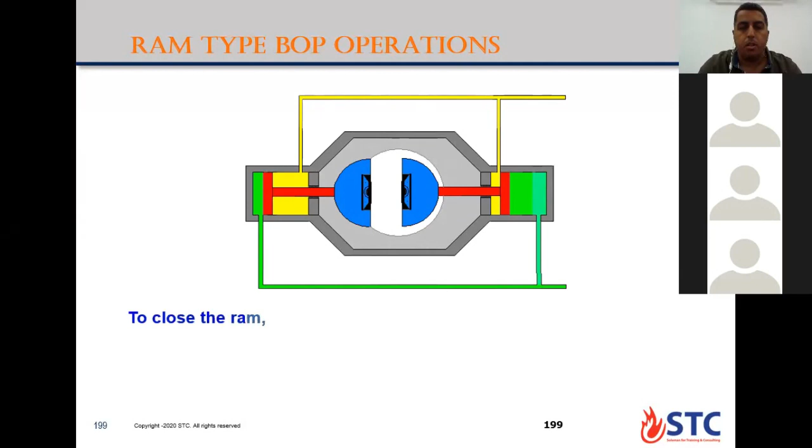This one is RAM-type BOP operation. You have the pipe RAM, so you have hydraulic pressure to open the RAM or give pressure to close it. Each RAM is designed according to the manufacturer to require some gallons of hydraulic oil to close or open. Usually the hydraulic fluid is a closed loop system. When you try to close, you get hydraulic oil passed here to the closing chamber to fill and push the ram to close around the coiled tubing. The other side, the opening chamber, will be vented back to the reservoir tank to the accumulator bottle to be charged again. So this is a closed loop system.

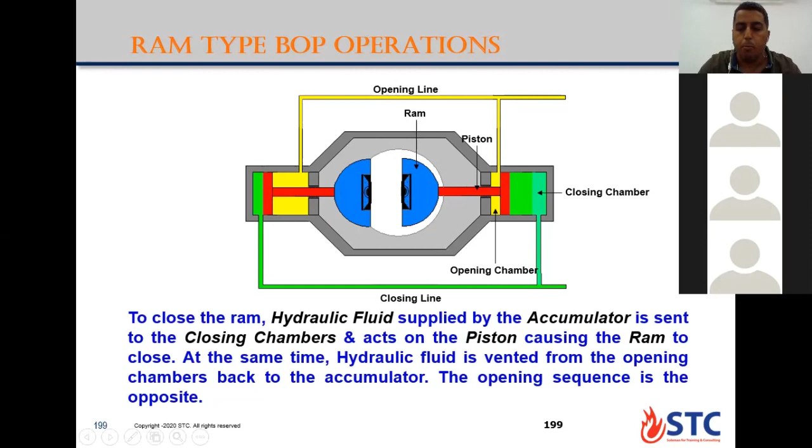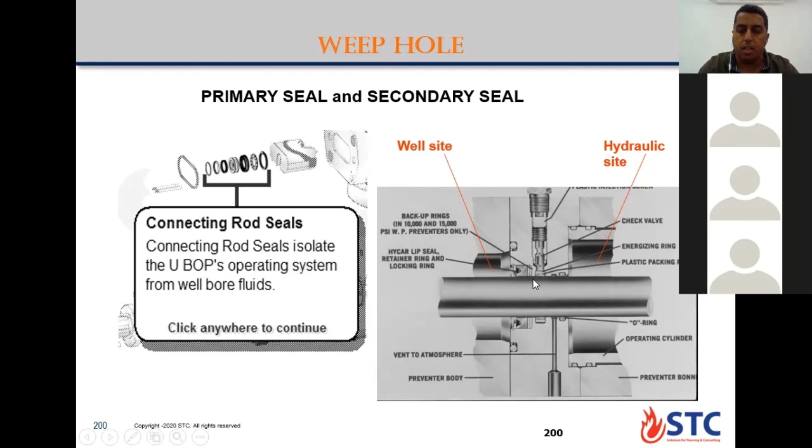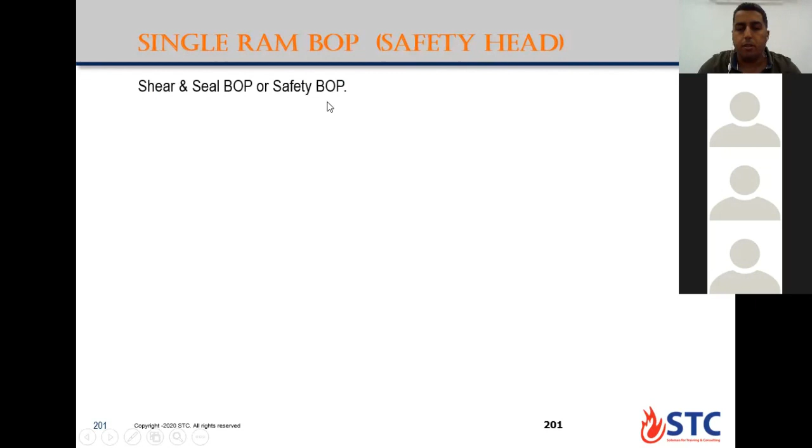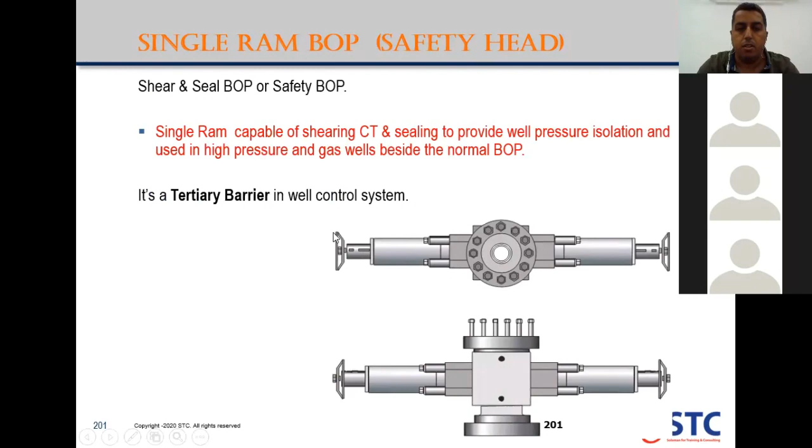This one is the third, or tertiary, well control barrier. In some manuals it's called single ram, safety head, or shear seal BOP. This is used to increase the capability of shearing coiled tubing while at the same time sealing the pressure or isolating the well pressure, especially in high pressure and gas wells, besides the normal BOP, according to company policy. This tertiary well control barrier is mounted above the Christmas tree directly, without any connection below.

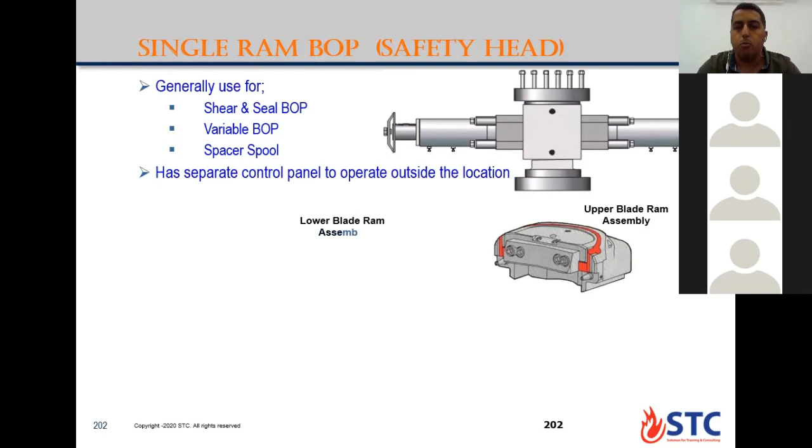It has a separate control panel. We can operate it from a different panel, also from outside the location, because this is the last option. The same remote control panel which has the ESD should also have the capability to operate the safety head in case of any leakage below the safety head, or between the safety head and the normal or quad BOP.

You apply the shear seal as the last option, because you will cut the coiled tubing, dropping it in the well, and then close all valves on the Christmas tree. Before you operate, if you are at the bottom and need to operate the safety head or shear seal, you need to pick up about 10 feet from the bottom and then start to operate the shear ram. Why? To give a chance for the coiled tubing to drop to the bottom of the well, so the Christmas tree valve will be free from any coiled tubing passing through.

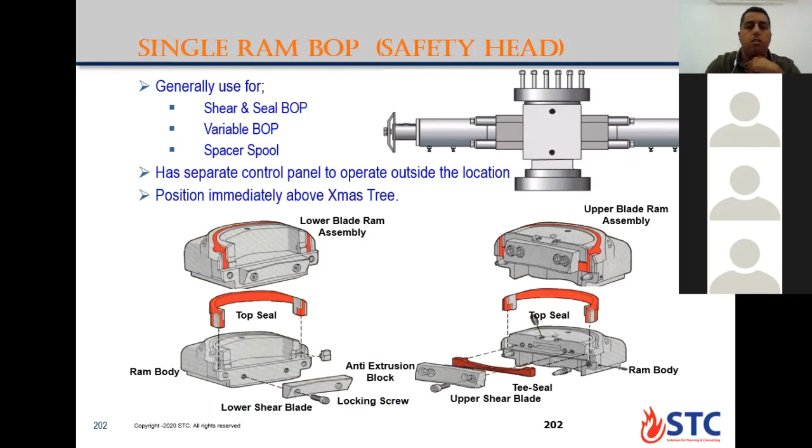This is the shearing and sealing at the same time for the safety head, positioned immediately above the Christmas tree valves.

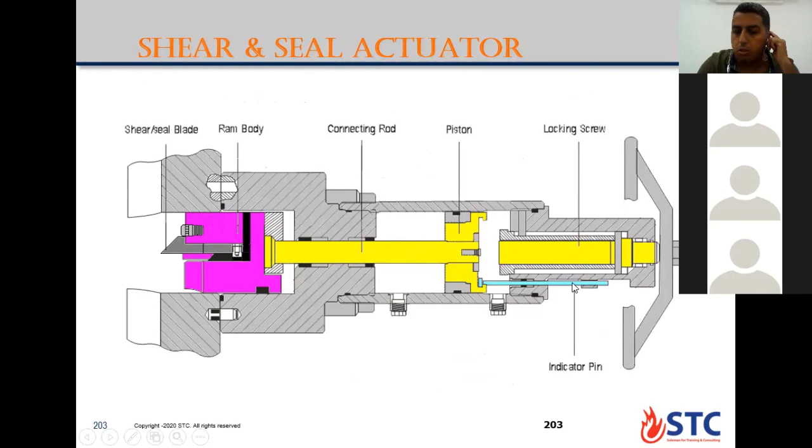This one is the shear seal actuator. This pin gives you indication about the closing and opening of the ram.

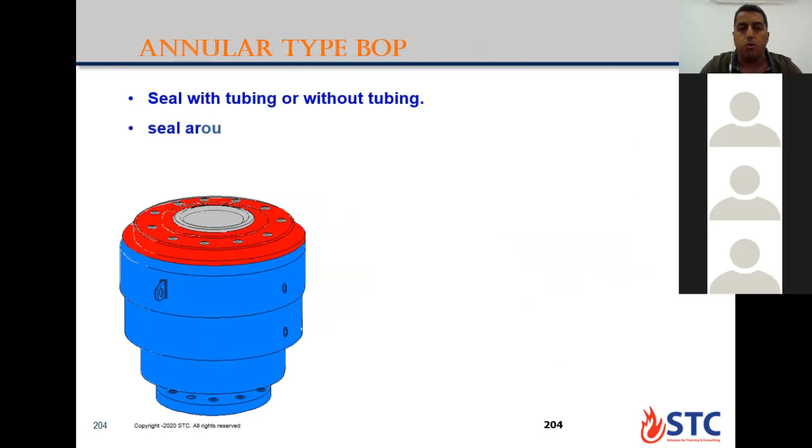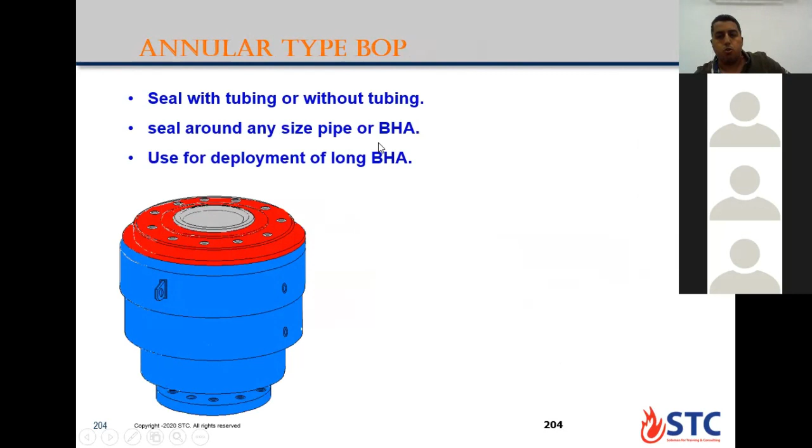This one is annular type BOP, sealed with tubing or without tubing, sealing around any size or shape of pipe or bottom hole assembly, mainly used with long bottom hole assemblies in the deployment system. It's optional, usually installed below the stripper assembly, and has a piston, packing element, and head. You give pressure from the accumulator or hydraulic system to push the piston up to squeeze the packing element to seal around the coiled tubing or bottom hole assembly. You have another port, the closing/opening port, which gives pressure to retract the piston and open the packing element around the pipe.

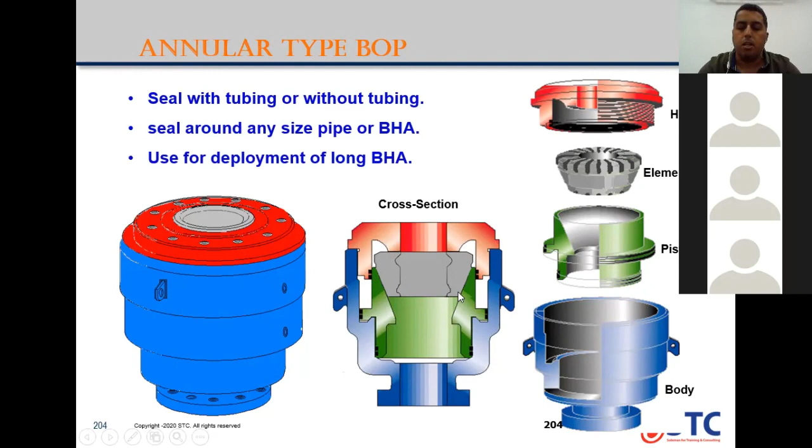This one shows the piston, packing element, opening port, and closing port here.

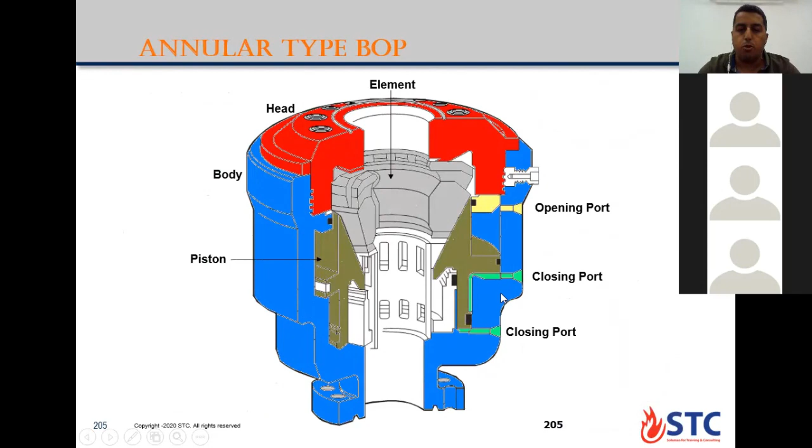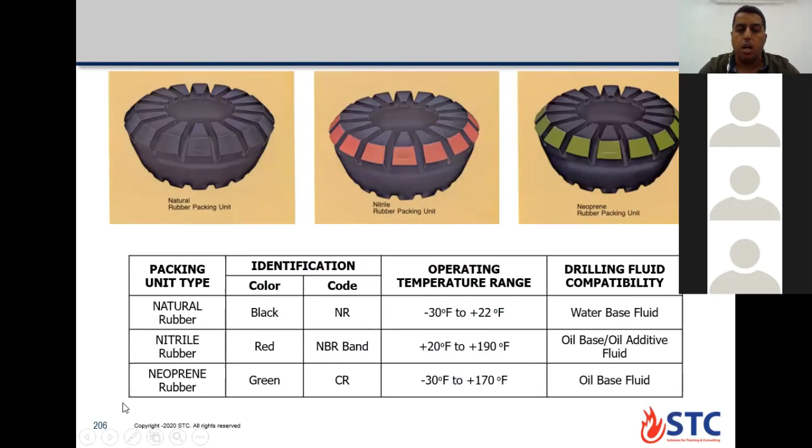This is the material of the packing element used in the annular preventer. You have 3 types of rubber. Natural rubber is suitable with water-based fluid. There is also nitrile and neoprene. Nitrile has additives against H2S and oil resistance, so it's suitable if you are working in an oil or gas well. Nitrile is used in high temperature, and neoprene is used in low temperature.

This is another option which is called flow tee, or pump in sub. Usually the pump in sub is installed between the shear seal or below the BOP. It's used to vent any pressure or take return from the well for circulation, allowing bleeding of well fluid and gases, and assisting in introducing fluid or taking returns from the well during circulation instead of using the kill line. The kill line is only for emergency or killing operations.

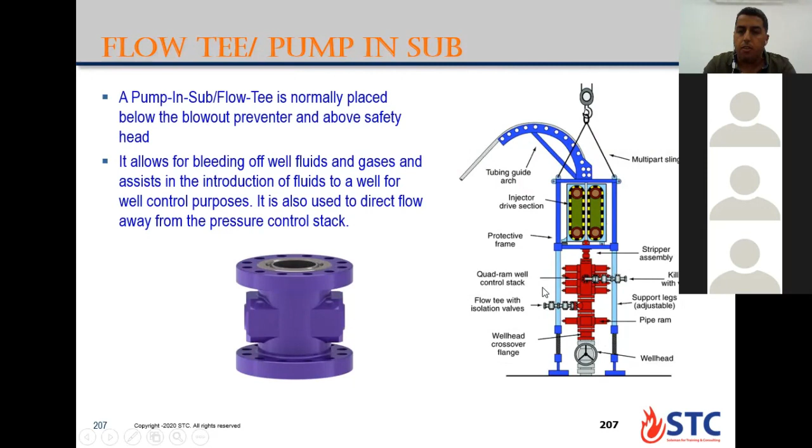This valve, or pump in sub, must have 2 isolation valves from outside. Normally one is manual, the first one near the body of the flow tee, and the external one is usually a hydraulically operated valve, or in some cases both are manual valves. So you have 2 isolation valves, a double barrier.

In some cases you have 2 isolation valves above the Christmas tree. In some cases we use an isolation valve or a 2-way valve above the Christmas tree.

Did you use this one before?

Above the Christmas tree, all stacks here for BOP must be pressure tested from below. That means all pressure will be against the crown valve for the Christmas tree, right? But we said yesterday that all Christmas tree valves hold pressure from below, and now you apply pressure, it's holding pressure from the top. That's why instead of holding pressure from the top, you nipple up another valve which is called the isolation valve. The isolation valve holds pressure from top and from bottom. So all pressure for your BOP stack will be against this closed valve to protect your crown valve of the Christmas tree from failure.

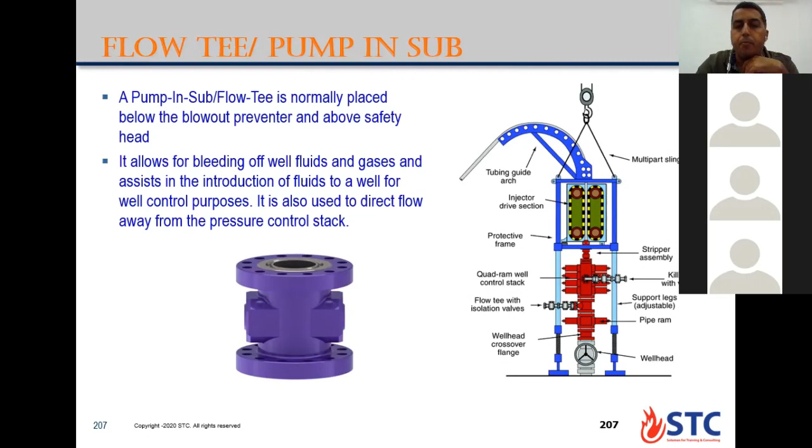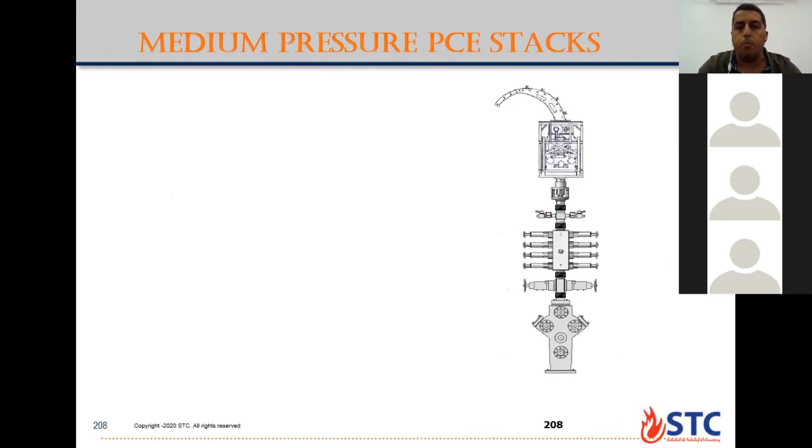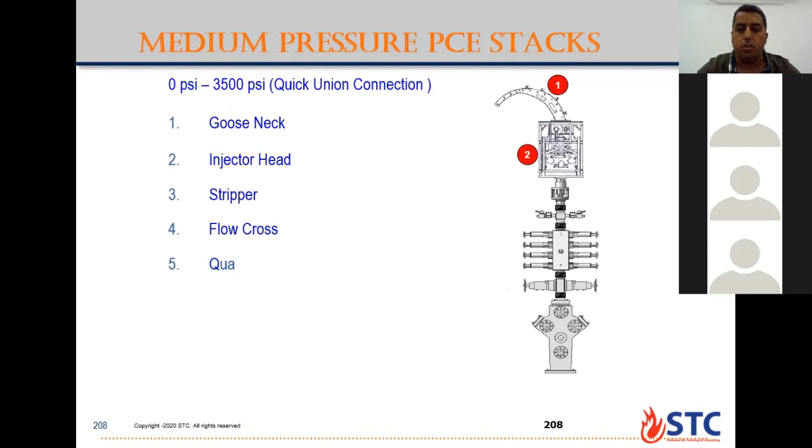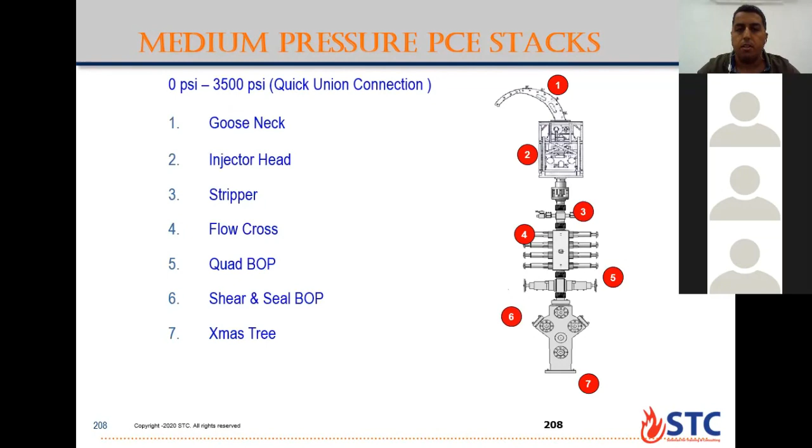This one, medium pressure control equipment stack, according to the policy in some companies, from 0 to 3,500 PSI. This is the rigging up recommendation: gooseneck injector head, stripper assembly, flow T, quad BOP number 5, shear seal, then Christmas tree number 7. This is for medium pressure.

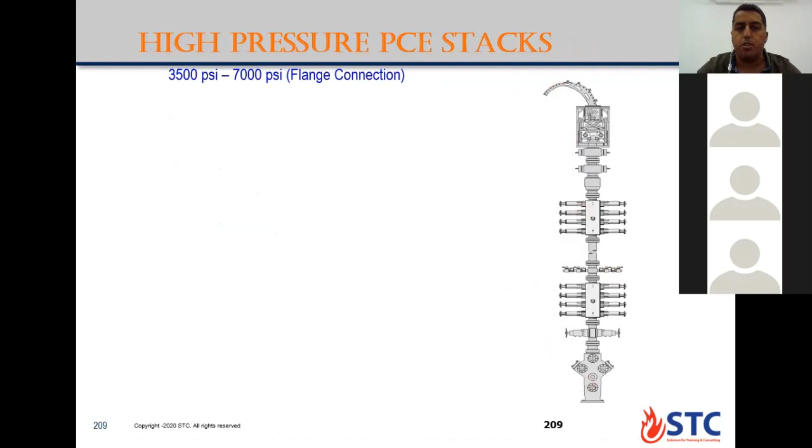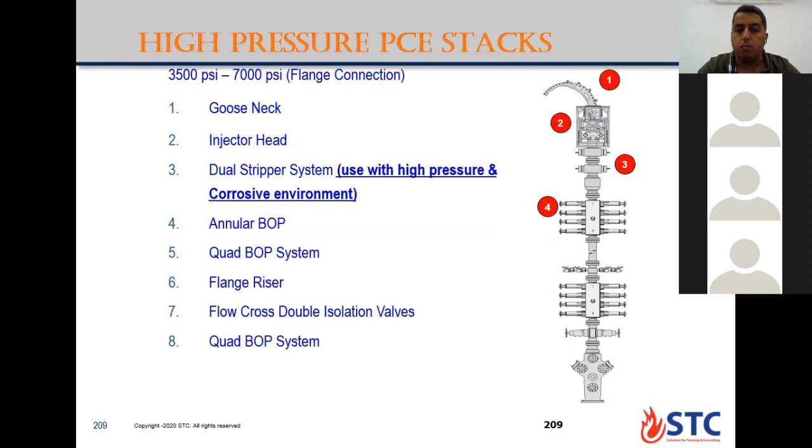High pressure rigging up from 3,500 psi to 7,000 psi. It should be flange connection, gooseneck injector head. Then you have dual stripper, which is used in high pressure and corrosive environments, which is a choice. Annular BOP optional, quad BOP here. Flange riser, flow cross, double isolation valve. Then another quad BOP, extra precaution. Then shear seal below, above the Christmas tree. This is extra precaution in case you have high pressure wells. This is some recommendation according to the strategy or policy in some companies.

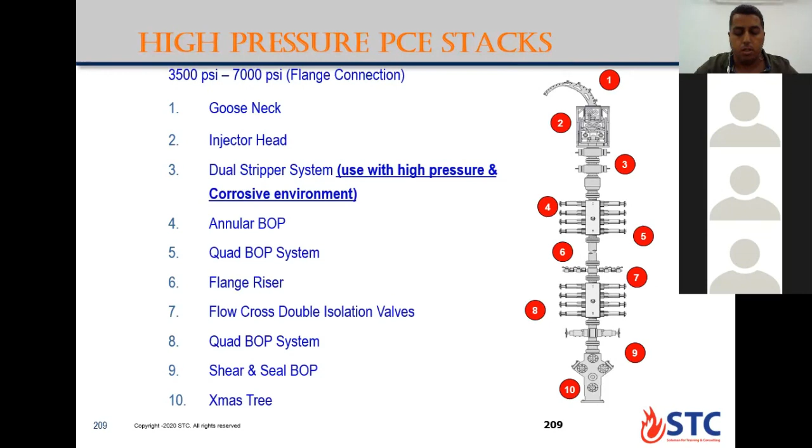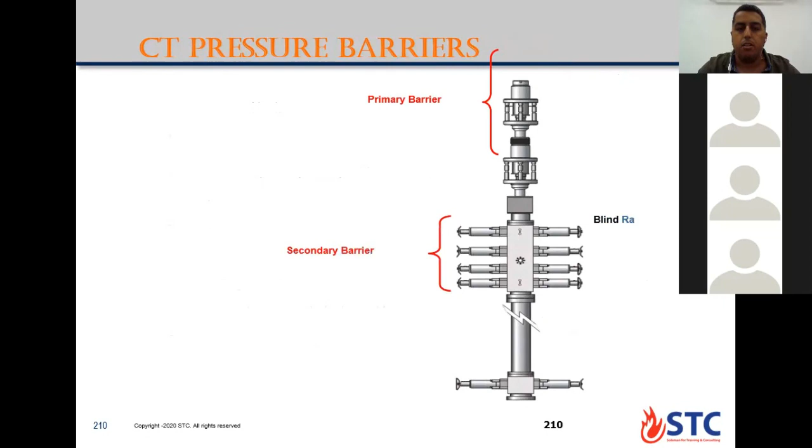Again, just to remind you, this is the primary barrier, the stripper assembly. Secondary barrier is the quad or compact BOP. Tertiary one, or last option, is the shear seal above the Christmas tree.

How can we pressure test the pressure control equipment? Before exposing any piece of pressure control equipment or the BOP to the well pressure, we need to pressure test and check the integrity of the system or the rigging up. So now the primary barrier is the stripper, secondary barrier is the BOP, tertiary barrier is the shear seal. All these elements seal the pressure in the annulus area around the coil tubing. So what is the primary, secondary and tertiary barrier to prevent pressure from going inside the coil tubing?

What is the internal barrier for the coil tubing? The check valves in the BHA. The check valve in the bottom hole assembly is the primary barrier. It prevents the fluid or pressure from passing up to the surface in case you have a broken pipe or leak at the surface. This is the primary barrier. It will be the check valve, and usually the check valve is tested, and it's a dual check valve, two check valves together. What is the secondary barrier in this case?

Internal. Once again, what is the secondary barrier? You need to have three barriers, internal and external. The internal barrier, the primary one, is the check valve. If you have failure in the check valve and a leak at the surface, what's your secondary barrier here? Secondary barrier is the reel manifold. No, not this one. The secondary barrier will be the shear ram in the quad BOP. If your dual check valve is not holding the pressure and you have an escape of high pressure at the surface, you will cut the coil tubing with the shear ram in the quad BOP. This will be the secondary barrier. The tertiary one will be the shear seal above the wellhead or the Christmas tree.

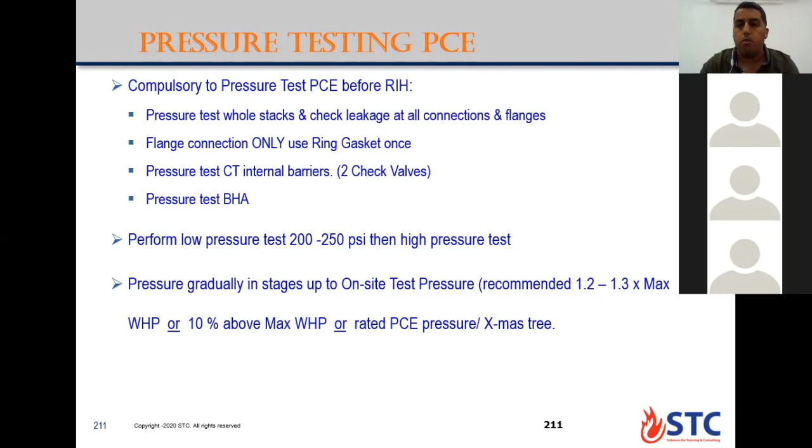There is another recommendation, according to API, talking about if you have a wellhead of 500 psi or 1000 psi, do you need first to go to 3000 psi for pressure test? In some policy or recommendation, they recommend the on-site pressure test be 1.2 to 1.3 times the maximum wellhead pressure expected during the job, or 10% above the maximum wellhead pressure expected during the operation. For example, if you have a wellhead of 1000 psi, you can go like 1200 or 1300 psi. You don't need to go each pressure test up to 3000 psi, which is the wellhead pressure for the Christmas tree.

Why do we do it like this? In some recommendation, they say more pressure on the body of the BOP means more fatigue for the material of the BOP. That's why they apply this recommendation.

But some company policies restrict it, doing the pressure test at the maximum pressure you can go, without taking into account the wellhead pressure beforehand. So you have 3 recommendations: full pressure test at the high pressure of the pressure control equipment or wellhead, or 1.2 to 1.3 times expected maximum pressure, or 10% above the wellhead pressure. This is for the high pressure test.

Do you apply this recommendation? No, so far no. This recommendation is only for on-site pressure test, but off-site or in the workshop, you need to go 100% for the pressure control equipment, for the BOP or lubricators.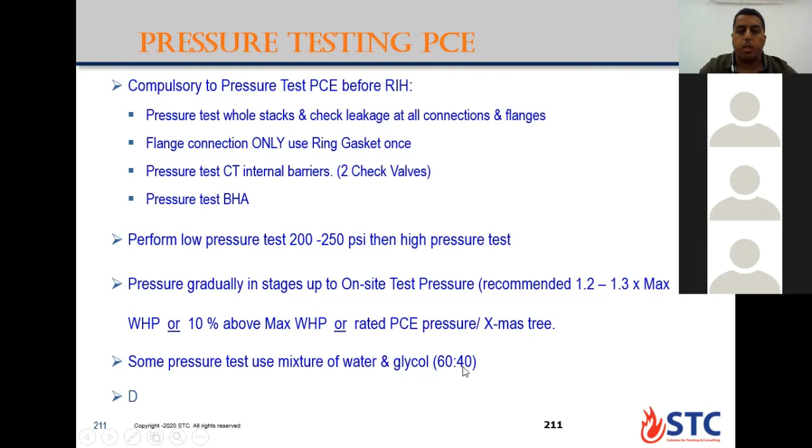Usually we do the pressure test with water, clean water, not mud or brine or nitrogen. In some cases, to prevent forming of hydrates or ice, you do the pressure test with a mixture of water and glycol, 50 by 50 on volume or 60% by 40% of volume. Also, we don't pressure test any coil tubing with nitrogen, because the nitrogen will start to cause erosion for the pipe and reduce the life of the coil tube.

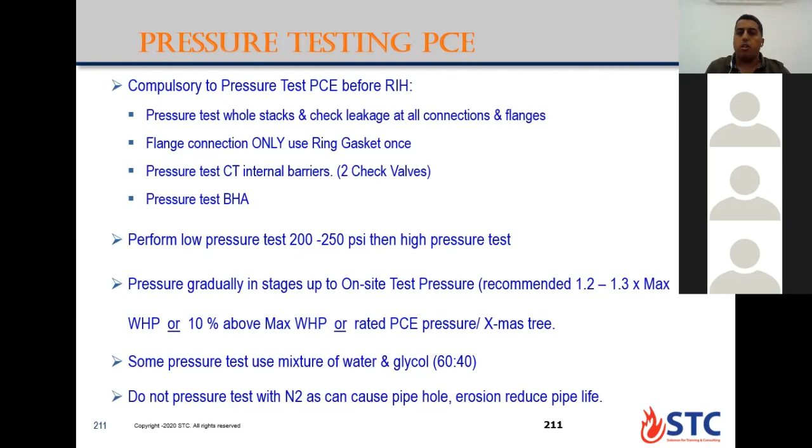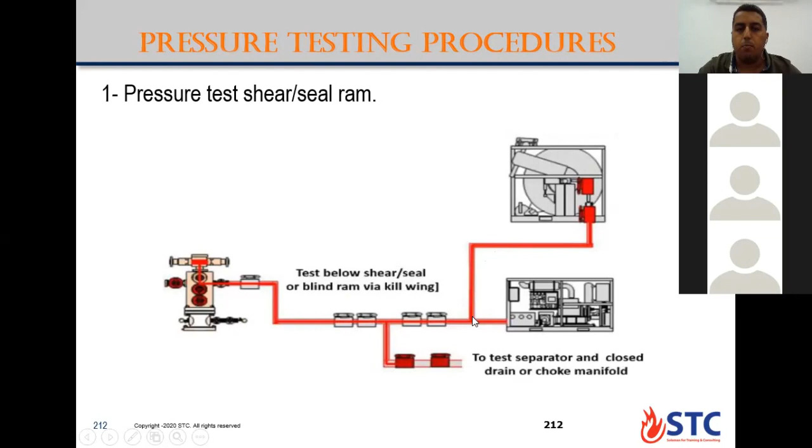So we'll start to pressure test from below the shear seal, from the wing valve of the Christmas tree. You'll apply the pressure at the same time to the surface line, the surface line low and high pressure test, till the inlet for the reel. This is the first test: low and high pressure testing of the shear seal ram.

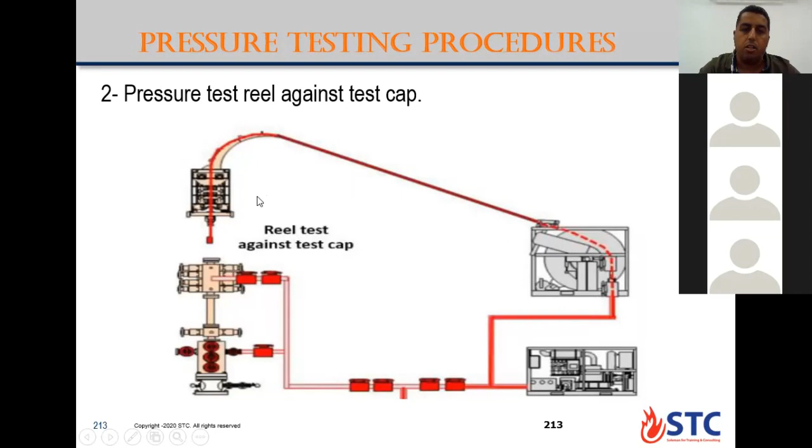After that, second pressure test, you need to pressure test the reel with test cap. You can install the test cap at the end of the coil tubing, and you start to pressure test all the coil tubing in the reel to the end. This is another pressure test.

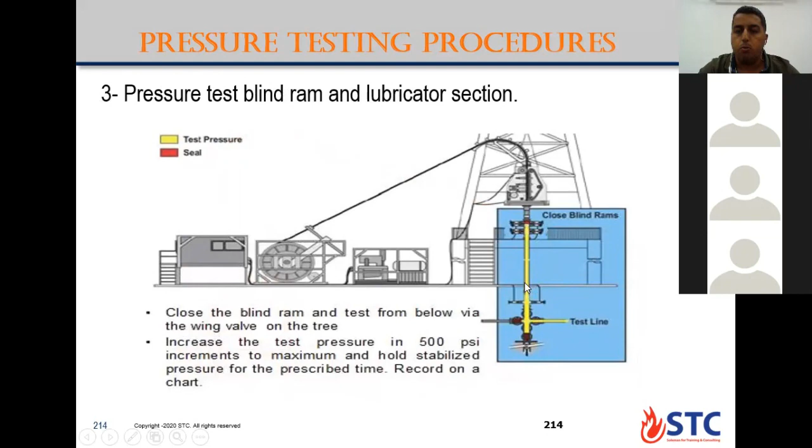Third one, after you nipple up the BOP, you will start to pressure test first the blind ram and lubricator section. You start from the wing valve of the Christmas tree, apply the pressure, which is the yellow color here. You close the blind ram, then apply pressure from below, including lubricators, after that you bleed off pressure test.

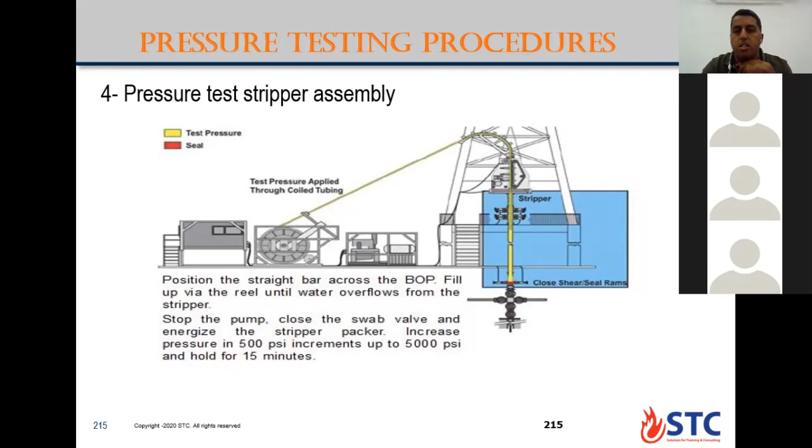Here you need to pressure test the pipe ram and stripper assembly first. You will apply pressure test through the reel. All pressure tests will be through the reel for the coil tubing, except the blind ram and shear seal ram, which will be from the wing valve of the Christmas tree. Here you apply pressure test, and it will go through this area. You close the shear seal, so it will be pressured up around the stripper assembly where the coil tubing is inside the well, to check if there is leakage around the stripper assembly.

Now, if I need to pressure test the check valve, what should I do? What should I do to pressure test the check valve? Inflow test, for sure.

Bleed off the pressure in the reel. I will start to bleed pressure above the check valve, bleeding off the pressure inside the reel to a certain value or to zero, but make sure you do not exceed the collapse pressure for the coil tubing. Then there is pressure from below the check valve in the well. At this moment, you start monitoring the gauge for the pump or inside the coil tubing. If there is no buildup at the gauge, that means the check valve is holding pressure. If there is buildup at the surface, that means the check valve is passing pressure or fluid. This is how you do the inflow test for the check valve.

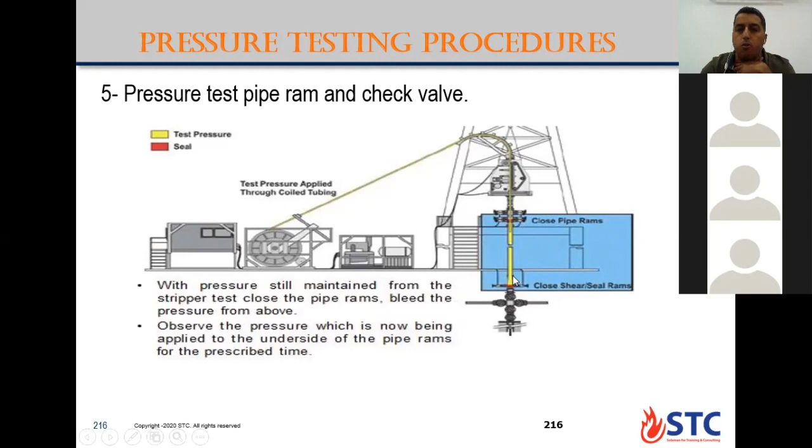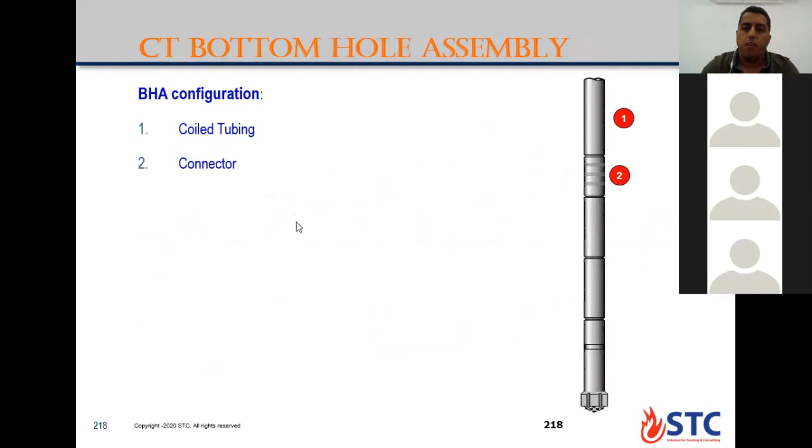Now, this is the coil tubing. What is the standard coil tubing bottom hole assembly we can use during operation? Bottom hole configuration must be in sequence like this. First, the coil tubing, then there is a connector between the coil and bottom hole assembly to have a connection to connect the bottom hole assembly. This connector can be external or internal, based on the design and job type, and also based on the minimum ID you can pass through.

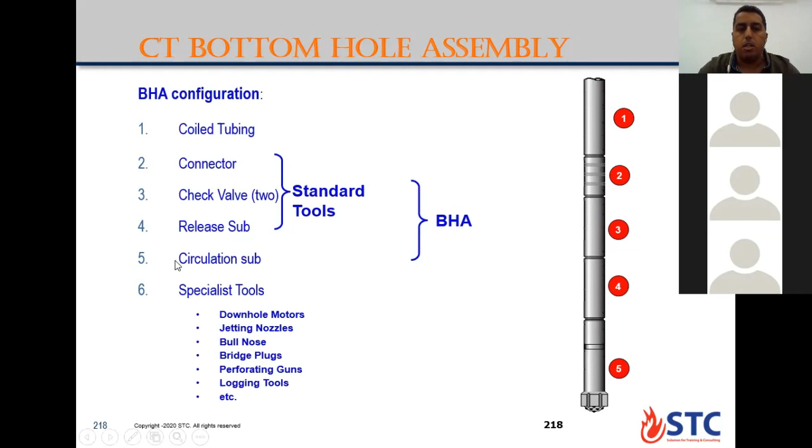The release sub allows you to release if you have stuck inside the bottom hole assembly of the coil tubing. So you drop a ball, then circulate behind it until it latches in place. Then you pressure up to release or break the shear pin. Then you pull the rest of the assembly and coil tubing out, leaving the stuck bottom hole assembly inside the well bore.

Here is the circulation sub. This also acts with a port - you drop another ball, smaller than the top ball. The ball lands in its place, then you apply pressure to break or rupture the disc or open the port. The port, once open, will be permanent inside the bottom hole assembly. That's why the circulation sub cannot be above the check valve - if you open the circulation sub, the check valve would become useless as a barrier.

At the bottom here, there is a special tool. It can be a motor for rotating, a jet nozzle for washing, a bull nose, a logging tool, or a perforation gun, based on the job you need to perform.

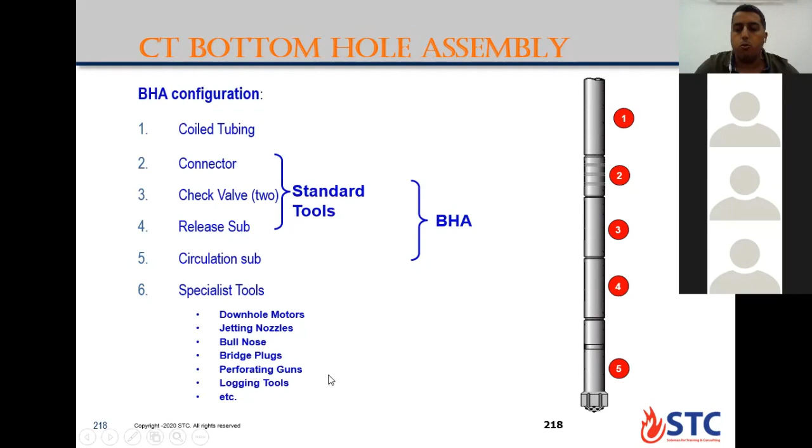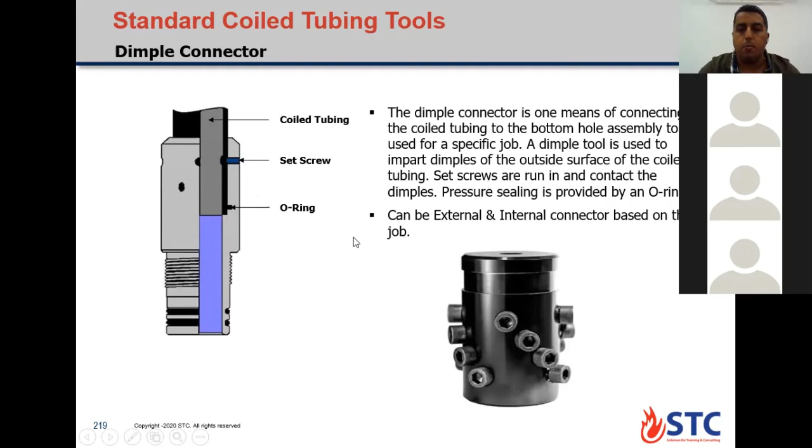This is a different type of connector. For coil tubing, you have the dimple connector here. This is the dimple tool. You have a set screw here to connect the coil tubing with the connector, and there is an O-ring here for sealing. This one can be external or internal connector.

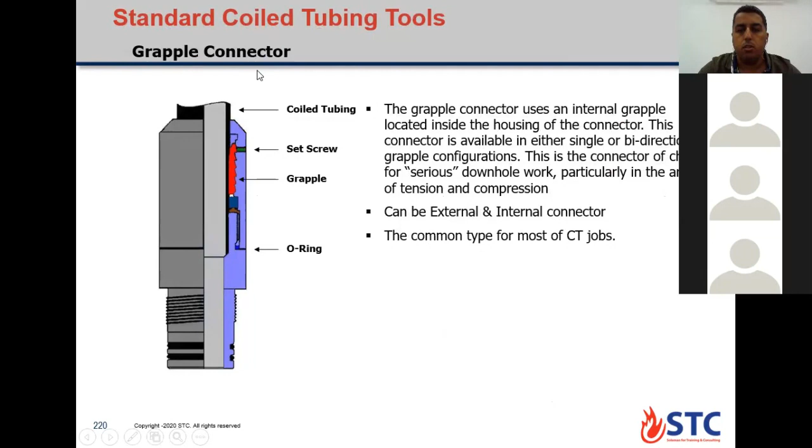This is another type, called the grapple connector. This is the most common type. You have grooves like the grip for fishing, to connect also with set screw the coil tubing with the bottom hole assembly.

Which type do you use for connectors?

Roll-on is for a special case only. Which cases? Like if you have restriction, and when we do Y-tool jobs. You do Y-tool jobs? Yeah, for the ESP, when we do logging.

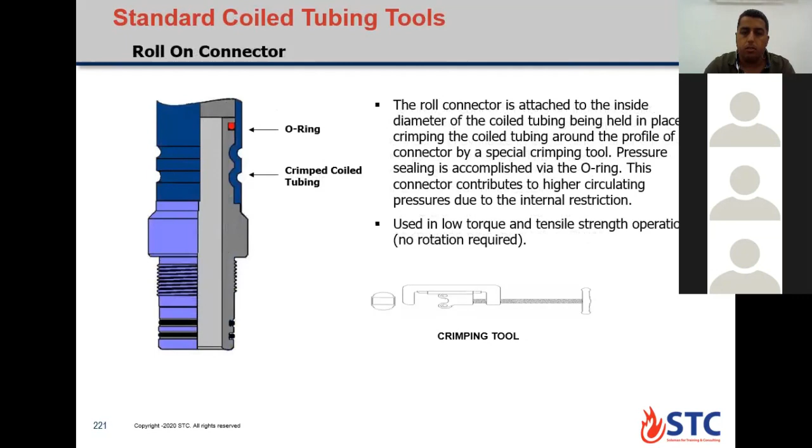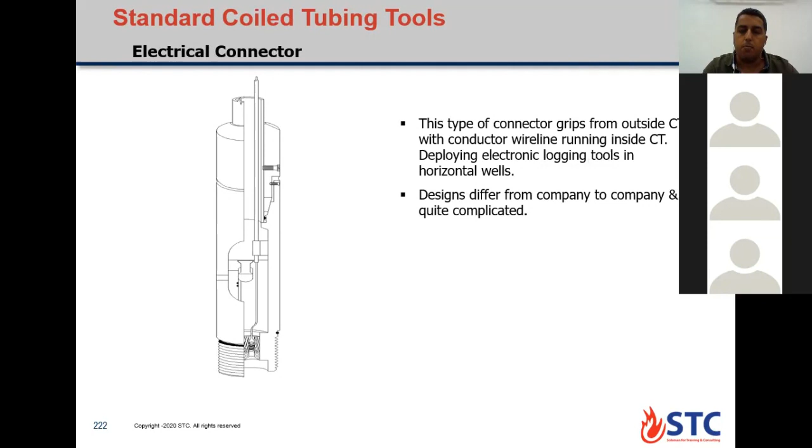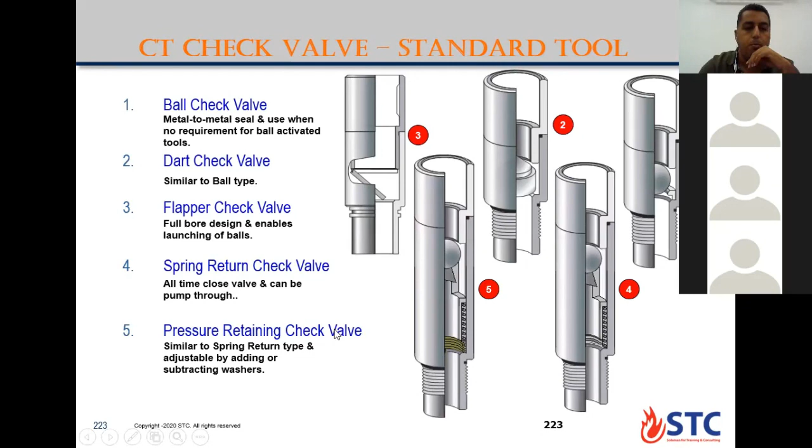This one, number four, is a spring return check valve. And number five, this one is pressure retaining check valve, applied with the pressure, similar to the spring type.

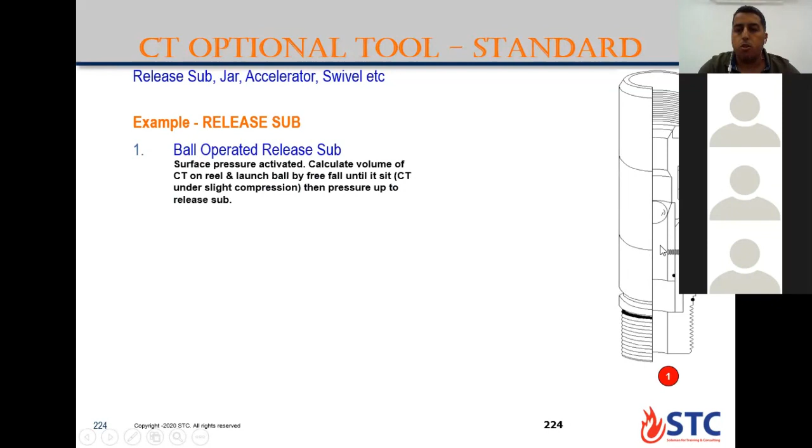This tool is the release sub. It can be ball operated. You drop the ball in the seat here, then you apply pressure, then you pressure up, then you straight up to disconnect this pin. So it will disconnect into two parts, then you pull out with the wireline out from the well.

Number two, this one is pressure activated release sub, similar to the ball type, but pressure differential in the coil tubing can activate the sub, the pressure from inside and outside after you drop the ball.

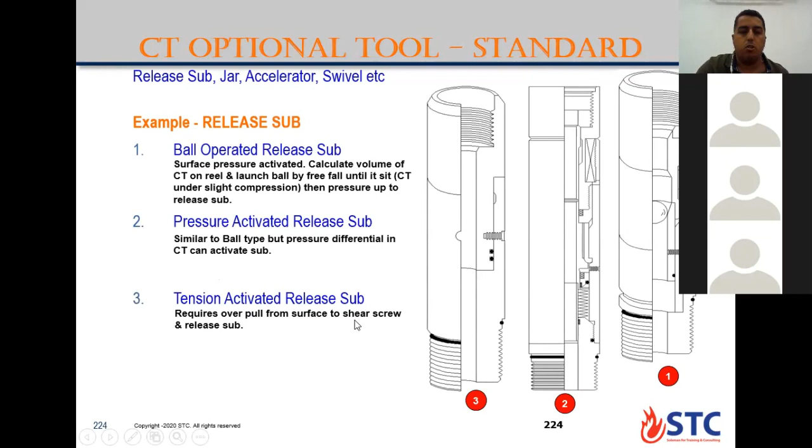Number three, this one is tension activated release sub. That means only with tension you can release or break this pin at a certain value. This one is not a common type because it can accidentally release with overpull during operation, releasing this tool by mistake. So this one is not a common type. We need overpull from surface to shear the screw and release the sub.

This is some special tool in the bottom hole assembly. It can be bullnose or port for circulation. Number two, this one, mule shoe and angle jet, to jet in certain areas.

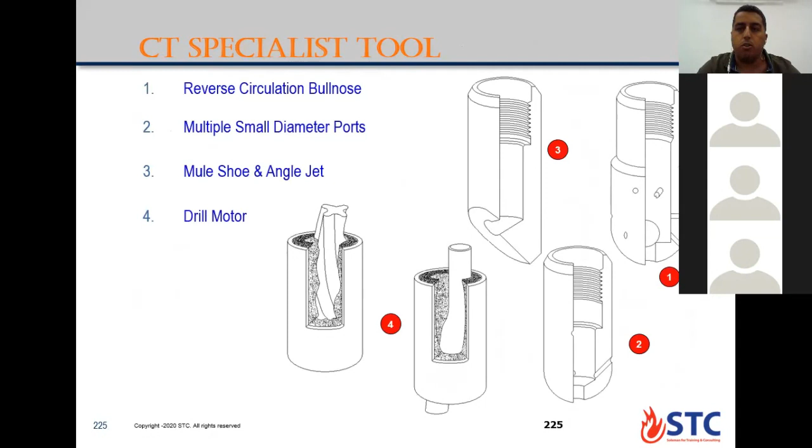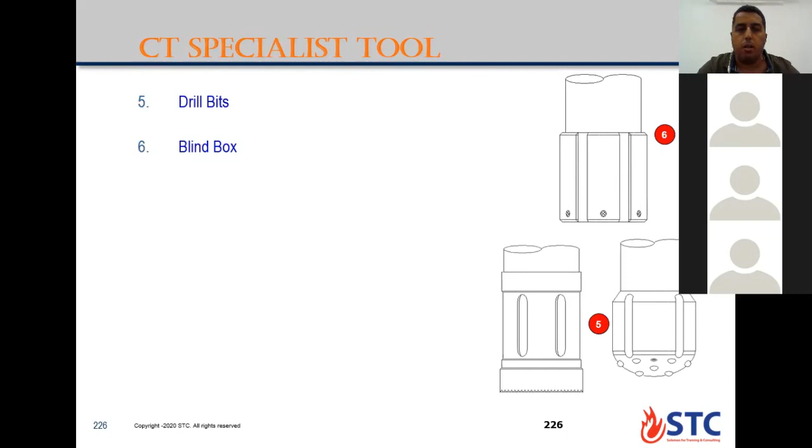And this one, number four, is drilling motor for drilling application, or clean out plugs or consolidated sand. Drilling bits for CT drilling application, blind box for fishing operation, casing cutter, under-reamer to enlarge the hole inside.

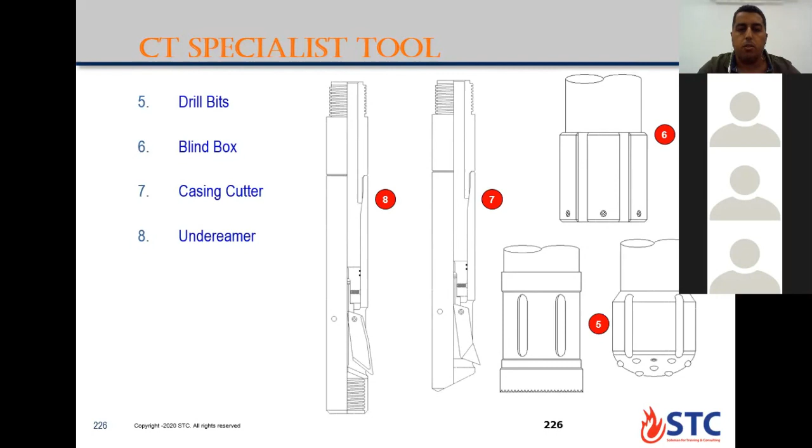This one is called CT tractor. Did you use this tool before? No, we didn't run it. This type can be used as part of the bottom hole assembly if you need to push the coil tubing inside a horizontal section or highly deviated well to the maximum.

So you have here, like, a roller. This roller is retracted. When you need to operate, you will start to pump through the coil tubing. At a certain differential pressure, this roller will come out from its place and grip the wall of the pipe or casing. So by continuing to pump through the coil tubing, it will start to push the coil tubing in the horizontal section to the maximum depth.

This one I used before in Saudi Aramco in one exploration well. We tried to do a stimulation job and logging job inside the multilateral well. So we activated this tractor and tried to push the coil tubing to the maximum depth we could, to record the logging at.

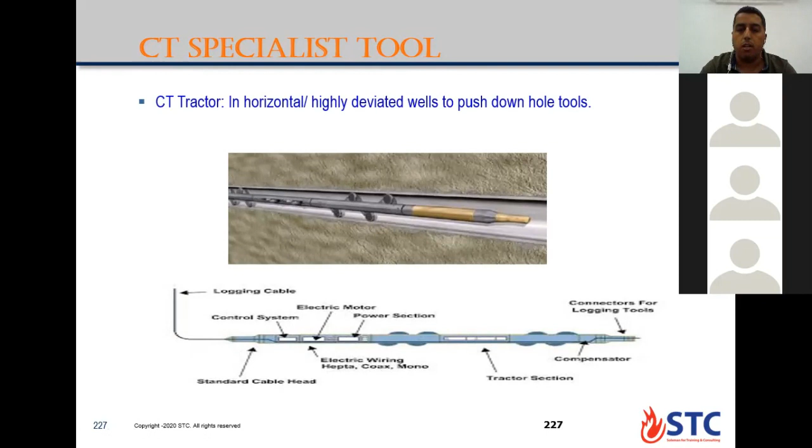Another special tool is called CT-MLT. This is in case you have a well with multilateral completion. You have many laterals inside the well bore, and you need to go inside a selected one lateral. So this MLT gives you the chance, with differential pressure also working, to perform well intervention job, acidizing job, or logging inside a multilateral well.

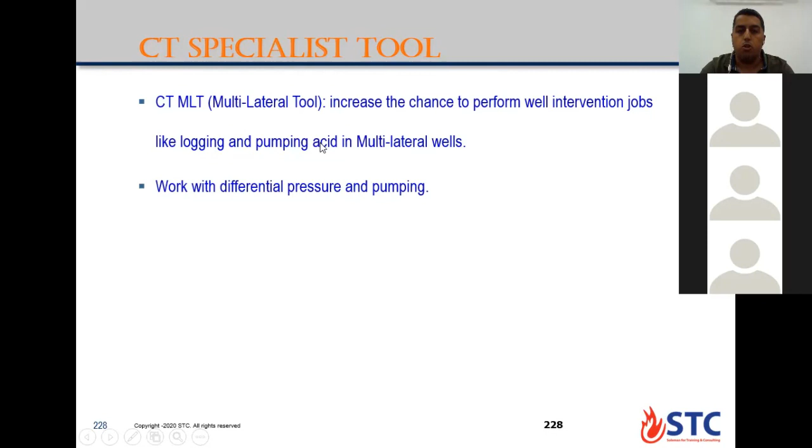It works also with differential pressure and pumping through the coil tubing. This one is to check or search the degree or azimuth for the multilateral tool to select which lateral you need to go inside. Did you work with this tool before?

Coil tubing, CT coil tubing tower? No, I didn't.

I also used this one in Saudi Aramco on one well, an exploration well, because that time we had an accident with the crane. The crane operator at that time slacked some weight while hanging this section, and accidentally we had a leak in the Christmas tree during a stimulation job, on a live well.

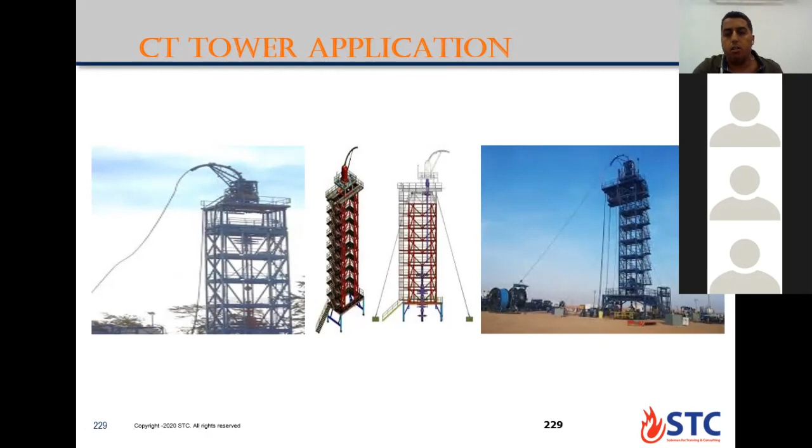At that moment, we secured the well and we ordered this coil tubing tower for safe operation. We don't need to have a crane on location. So it is safe, cost-effective, rigless, for long assembly operations, using a hydraulic jacking system.

After that, we will talk more about how the coil tubing can be affected and what is the damage source or fatigue or failure for coil tubing during the operation. What are the causes that can lead the coil tubing to fail?

Usually when the coil tubing comes to the location, you need to know the percentage of remaining life for the coil tubing, how many runs, and after how much percentage is consumed, you need to discard the coil tubing or take it out of service. What's the policy about the percentage for coil tubing?

Sorry, once again. You have a percentage for the coil tubing, the remaining life for the coil tubing, right? According to each job you perform. This can be calculated from the system or the computer system, right? So at what percentage, according to the policy of your company, do you reject the coil tubing out of service?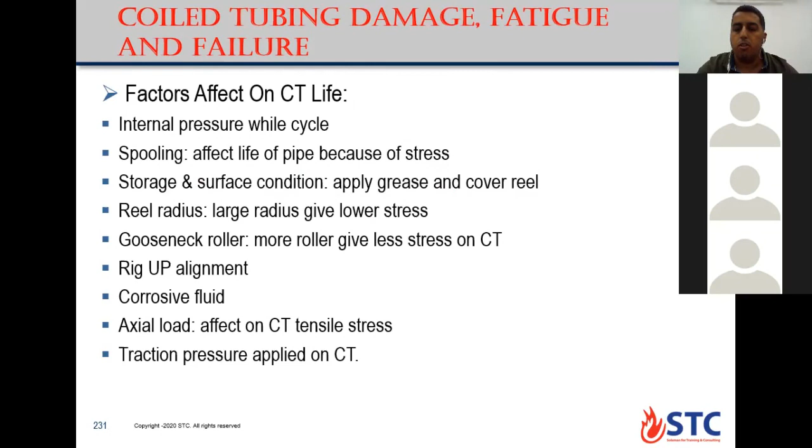This is the bending stress or cycling fatigue for the coil tubing during bending stress. Here, the coil tubing is bent on the reel, then it starts to straighten while running in hole, then bends again at number 2, the maximum bending over the gooseneck, then straightens again while running inside the well.

While pulling out, the reverse happens: bend, another bend, then straight, then bend again. This is called a bending cycle. The bending cycle has 3 places where it happens during the round trip and pulling. Each place has 2 events: 1 and 6, 2 and 5, 3 and 4. So normally we have 3 bending cycles with 6 bending events during a round trip of the coil tubing, especially if you have pressure inside the coil tubing also.

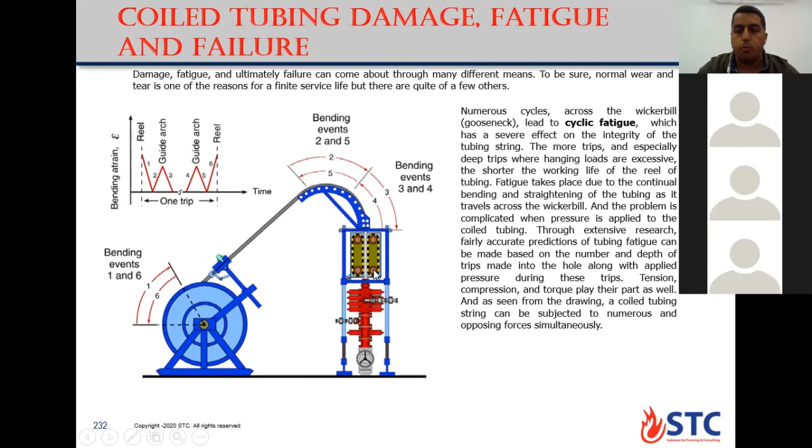This is the definition called ovality for the coil tubing. What is the meaning of ovality for coil tubing?

Any answer? Sorry, one more time. What is the meaning of ovality for coil tubing?

Ovality is the shape, means whether along. Yeah, the coil tubing is come out of round. It's take the oval shape. Okay, this is the meaning for ovality for coil tubing.

Usually, the coil tubing while manufacturing is not come 100% in round shape. There is little bit deformation due to the manufacturing and sizing for the coil tubing.

So if you need to measure the ovality for the coil tubing while operation, especially if you have high pressure inside, during the inspection, you can read percentage for ovality by this equation: the maximum OD for the oval shape minus the minimum OD, divided by the design OD for the coil tubing, like 3.5. So you measure the maximum and the minimum minus by the designed or the standard OD for the coil tube.

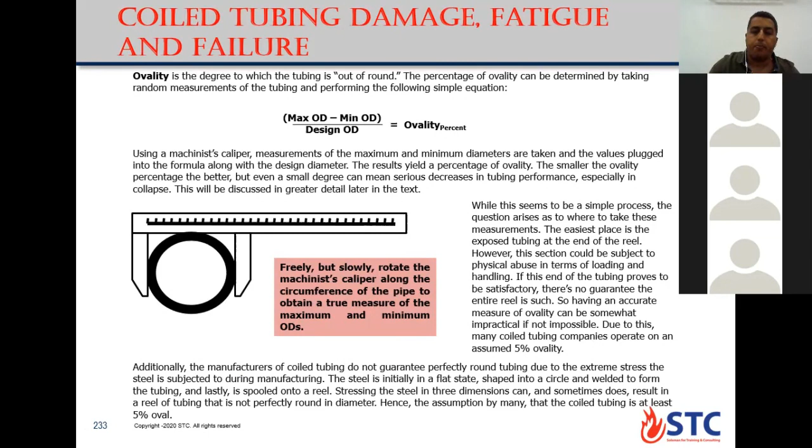This is another source for coil tubing damage also. When you pump abrasive fluid like cement or sand-laden fluid containing sand, it will cause wear for the coil tubing from inside or outside, which will result in shortening the working life for the coil tubing.

Another source for coil tubing damage also is the tension or the stress. If you're hanging the weight of the coil tubing for a long time, you have overpull or tension. So the coil tubing starts to have fatigue with time, and the fatigue will affect the collapse resistance and burst resistance for the coil tubing. Excessive tension contributes greatly to a decrease in the collapse resistance.

Also, when you have an oval pipe, the first effect is that the thickness for the coil tubing becomes thin, so it will also affect the collapse. The collapse resistance will be less over the operation.

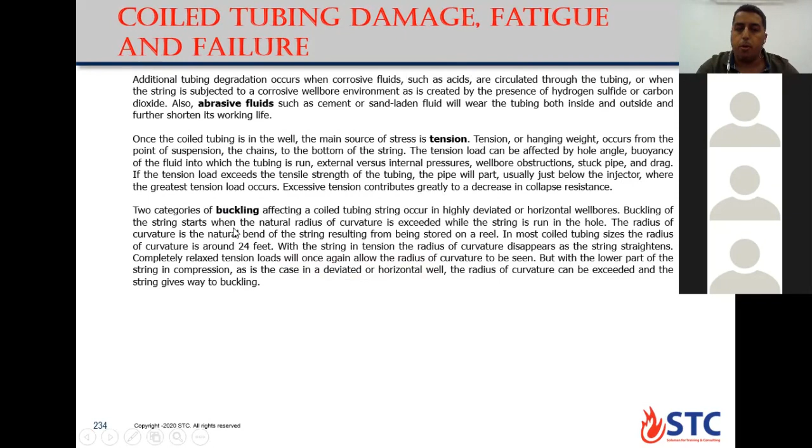There is also a concept called buckling for the coil tubing. There are two types of buckling that can happen for the coil tubing, when you start to apply push force to the coil tubing string, especially in a deviated or horizontal well. First one is sinusoidal buckling, like the S shape. When you're pushing the coil tubing more, you have slack weight on the coil tubing, so you will convert to another type of buckling, which is helical buckling. At the helical buckling, when you start to put more weight, you will reach lock up, so you cannot go further down.

That's why in this case, you need to have a roller or tractor for the coil tubing, which helps push the coil tubing without the need to put weight on it and cause damage or fatigue due to the buckling effect. The buckling effect causes permanent damage or failure for the coil tubing, especially with a long buckled section in a horizontal well. All this failure or fatigue can be checked after making a full inspection, after finishing each job.

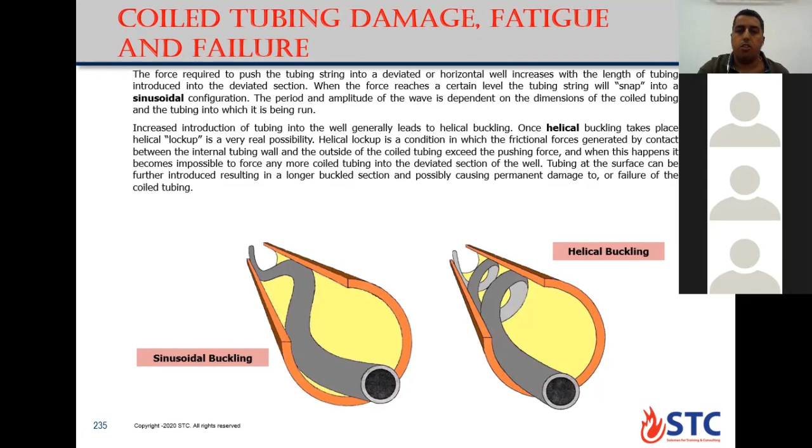Another source for damage or fatigue for coil tubing is the injector. If you grip the coil tubing many times under pressure and exceed the hydraulic pressure, you will have some marks. This mark comes from the injector chain from outside, which can make wear or scratching on the coil tubing from outside.

This mark also happens from the slip ram for the coil tubing. When you operate the slip, it leaves this slip mark. That's why when you activate the slip ram, after you open it again, you need to pull out a certain length to visually check the coil tubing outer diameter, or check the surface or body of the coil tubing from outside. Because all this scratching over time will affect the collapse and strength of the coil tubing, causing fatigue, pitting, or holes on the coil tubing, and damage.

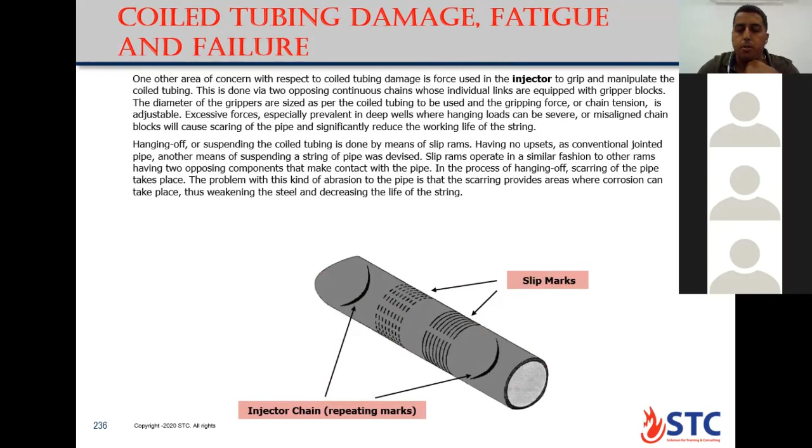This one is crack, can happen. Different types of crack can happen, like angle crack or longitudinal crack.

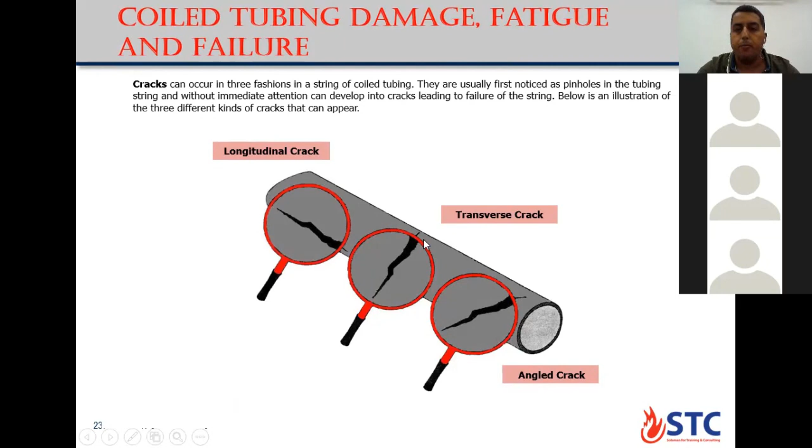This crack, first when the coil tubing is filled, will start with a small hole or pitting. Then with time it will enlarge and start to have the crack in the coil tubing. The pitting is the first thing you can find in the coil tubing.

This one you cannot notice by eyes, so you check by the process for checking the coil tubing after each job for inspection.

This can happen due to corrosion, internal or external pitting, which could happen when there is contact between the coil tubing and corrosive treatment fluid like acid job, or it can happen with atmospheric corrosion. That's why you need to apply grease when you store the coil tubing after the job, or it can be a combination of both.

Internal pitting is directly related to contact with improperly inhibited treatment fluid. That's why you need to add a small percentage of corrosion inhibitor during the job design. So it starts with pitting, then a small hole, then a crack or big hole.

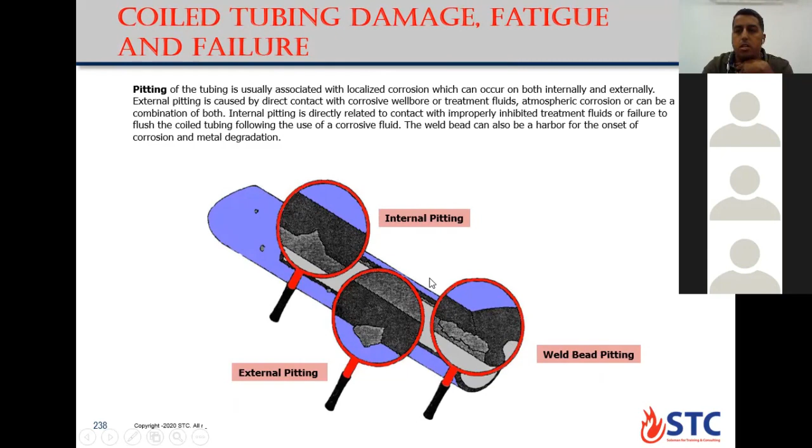This other source is called abrasion. It can be scratch or dent due to contact of the coil tubing with the high inclination well, or come from buckling. Scratch can happen as a result of contact with a sharp edge.

Like when you are running inside the well, you have scratch if the coil tubing is not centered inside the well bore. So you have contact between the coil tubing and the wall of the pipe, or inside the BOP equipment, or it can happen due to coil tubing handling and spooling equipment.

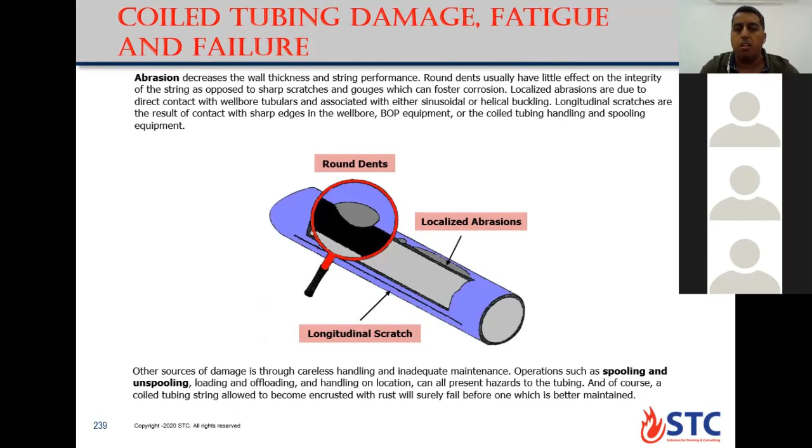This can also cause damage or affect the wall thickness of the coil tubing, affecting performance or causing failure or fatigue to the coil tubing over time.

This is the type of inspection method for the coil tubing. After each job, we need to pass the whole reel through the magnetic flux leakage system.

This system is used to identify any drop in metal thickness in the coil tubing. When the magnetic source passes around the coil tubing, if there is any little pitting or damage, it can be detected by leakage of the magnetic field from the steel. It covers 360 degrees of the pipe, including outer diameter, inner diameter, and thickness. It can detect any corrosion, pitting, or defect in the coil tubing and give you the result.

It can either continue or be rejected from the steps.

Okay, gentlemen, Ms. Hajar, okay? Yes. Do you apply this type of system in your operation?

We still don't have it here; we do have in Schlumberger the coil scan equipment for the same inspection, but currently we use a third party to do the inspections. We use third party companies, but we do have this technology in Schlumberger, just not using it in Kuwait right now.